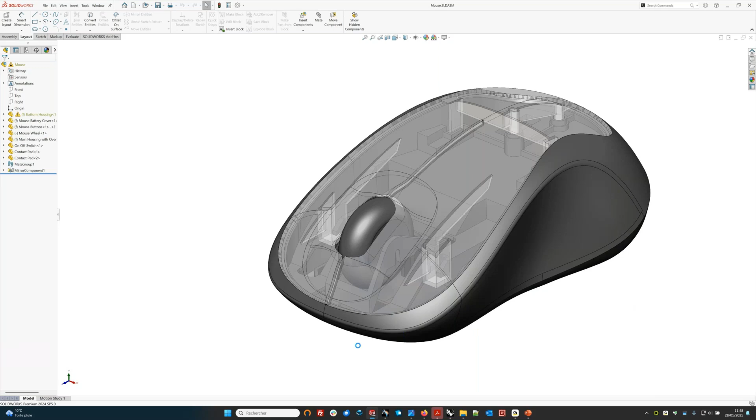You're writing the file into the folder. We will go to CATIA V5 now to show the result.

So this is it. As you can see, we are now in CATIA V5, and you get your full model, your full assembly. Again, you have the same colors as we have seen in SolidWorks. You have the components, you have the names, and we even have preserved the transparency effect.

So you're ready to work now in CATIA V5.

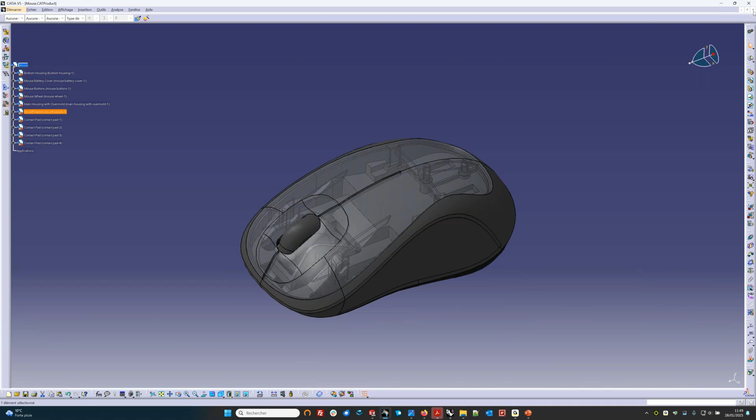A second case study, now we're going to show Cross Manager a little bit. So we will start with another file, this time from CATIA. This is the source file that I show you in CATIA.

As you can see, what's interesting here is we have a lot of PMI information. As you may know, in CATIA, they are organized in views and captures.

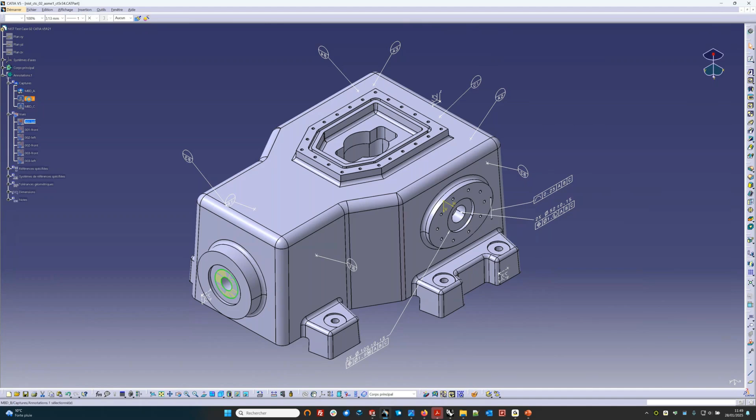We got 3, for example, here. So you can activate A, B, or C. I will show you that this is also converted.

So we will use this time Cross Manager. Imagine you don't own a license for CATIA, but with Cross Manager, you can perform the conversion. So always the same, very straightforward.

You just have to select the input format. I propose here to make a conversion into JT.

Imagining that you have files from CATIA and you want to send the files to a partner who's using Siemens PLM software, it's a good thing to use JT, which is the standard conversion format of the Siemens world.

So in Cross Manager, just input, output. Then you have some options in the configure menu where you can manage visibility of the entities, configurations, layers, things like that, assembly information, and some filters.

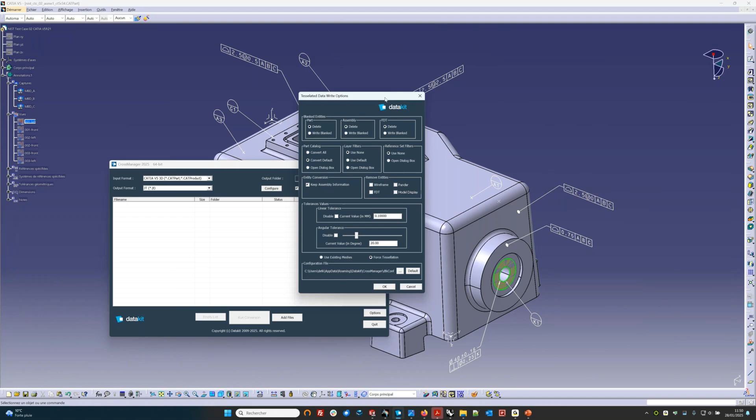And also, if the output is tessellated, you can parameter the tessellation. You can set it.

Then very simple, you just take your file, import it into Cross Manager. So either drag and drop, or you have an add file button, and you can run the conversion.

So in the window, you have a status telling you it's in progress. You have a window showing up, showing you the file and progress bars. Here it's very quick, and then you have the result, status is OK.

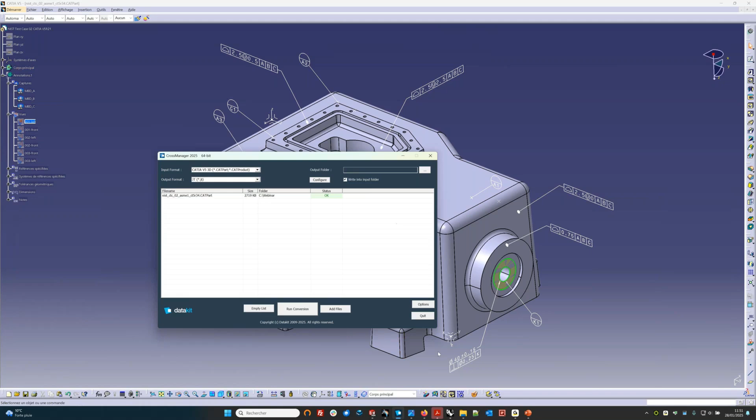So it's here that you can see that the conversion performed successfully. Another interesting thing is you get a report file after the conversion.

So this is what it looks like. It's in XML. So you get all information about the version of the product used, input, output format, version of the format, how long it took, and the entities that were read inside it.

I propose to take a look at the results. So this is the output that you get in JT. And as you can see, you've got the geometry, all PMIs are there, and also you have the captures.

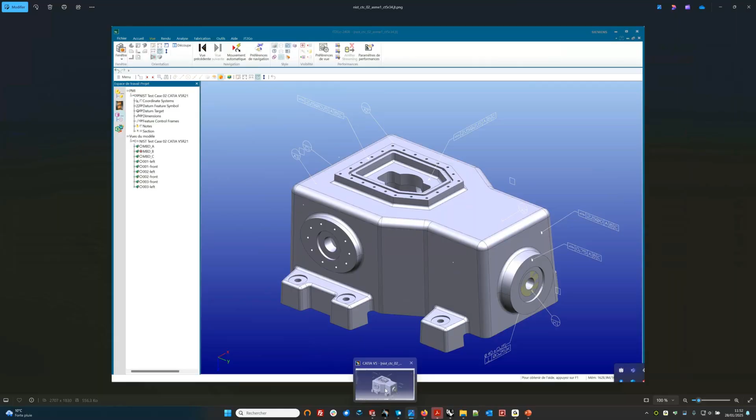We're showing here capture B. As you can see, it's really the same as what you had in CATIA. So you preserve this kind of information.

Another interesting bonus that we offer with Cross Manager is that we deliver with any purchase of license. We include free of charge a 3D PDF output.

The interest of this is you may not have the license for the software, the output format. You may not have a license for the Siemens software, and still you have to deliver files.

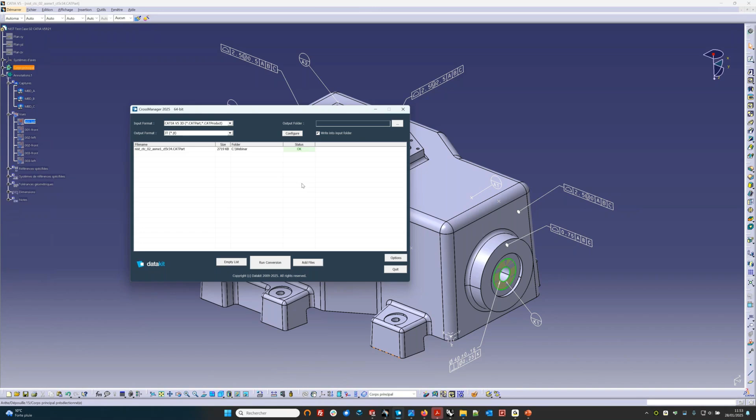So how do you do when you're unable to check them? One thing you can do is we propose export to 3D PDF. So you can convert your file and then check what we've been able to read directly in Acrobat Reader.

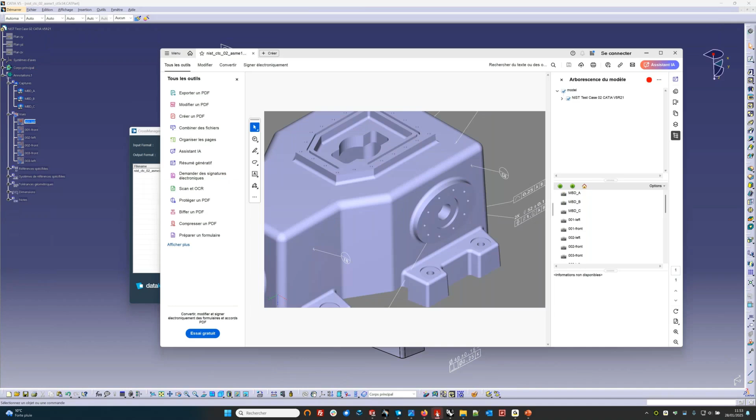We move to Acrobat Reader right here. So you get the file again, and even if you cannot read the JT, you're able to check the information that we've been able to read.

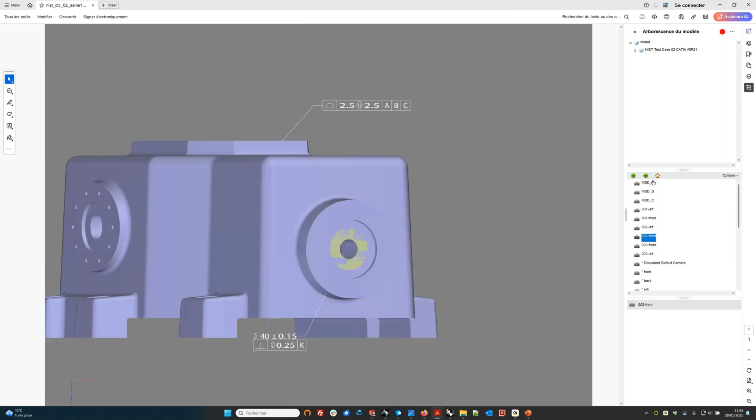You have the model here, you have different views, everything is there. You have the captures, A, B, C, everything is here.

You also have information in the tree. If there are metadata, you can also check them in Acrobat Reader. You can see them at the bottom right of the screen. And in addition to this, in Acrobat Reader, you can do measurements and you can do cut views, things like that.

So these are the functionalities with Cross Manager. Now let's move on to a third case. Now we will move to Rhino to show the Rhino plugins.

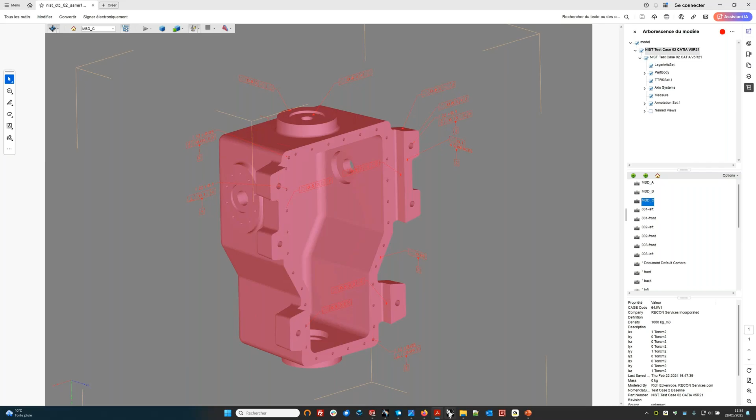Again, once the plugin is installed, you get a menu directly here, Datakit Exchange, very straightforward. This time I will show you just some imports of the same assembly in various formats to show you the multiplicity of formats. As you can see, directly from the menu, you have a vast number of CAD formats to choose from. So let's say you want to load an assembly in UGNX.

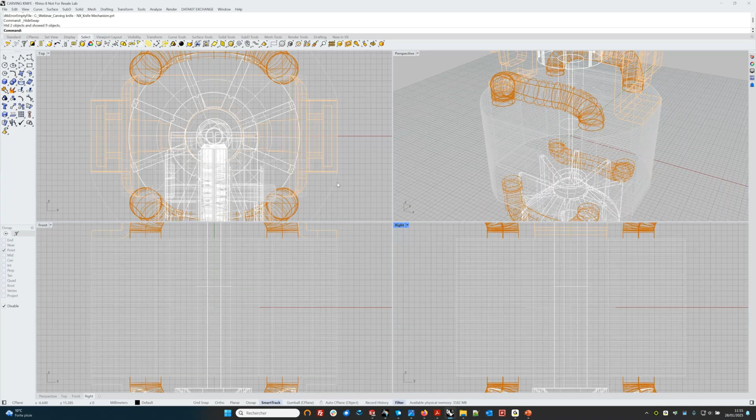Just a few clicks, UGNX open, and you get your file. You just have to select the head of the assembly and you load the whole assembly. Again, you have a window with progress bars to show you where you are in the conversion process, and you get your file directly in Rhino. You're ready to work in Rhino. So you can work with people from Siemens using UGNX, no problem. You got all the components, as you can see, directly in Rhino.

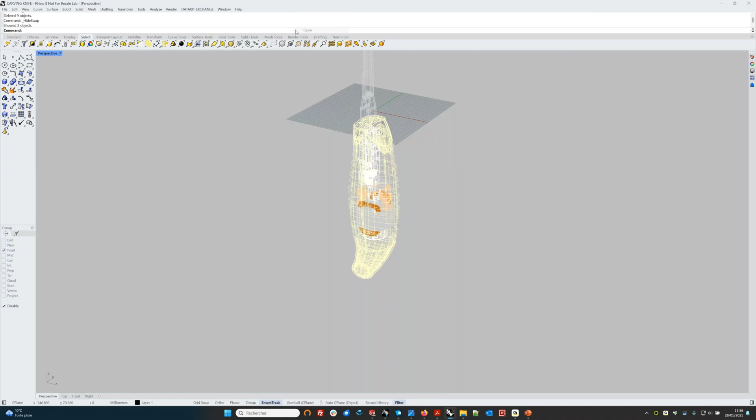Let's say now you're working with another partner using CATIA. No problem, import if you have the license, CATIA V5, open, and you get your file in CATIA format. Same process, you've got your input window with progress bars. All components are loaded. You're ready to work in Rhino.

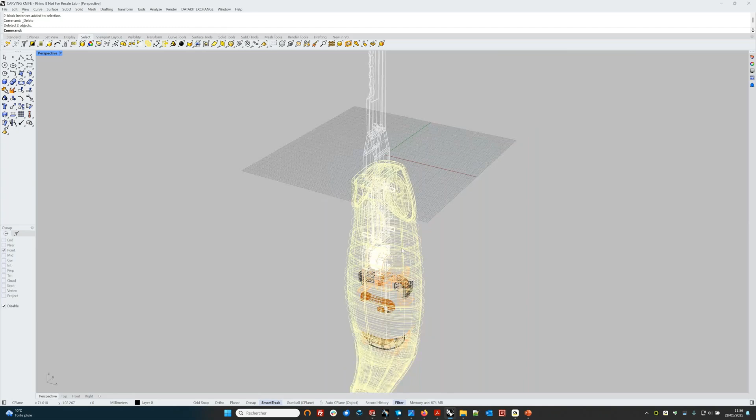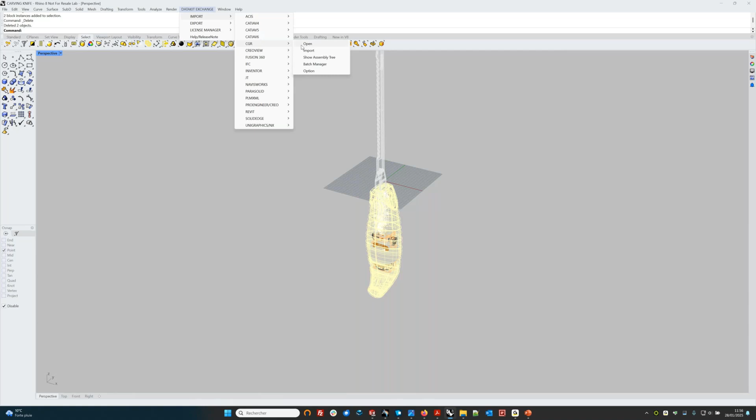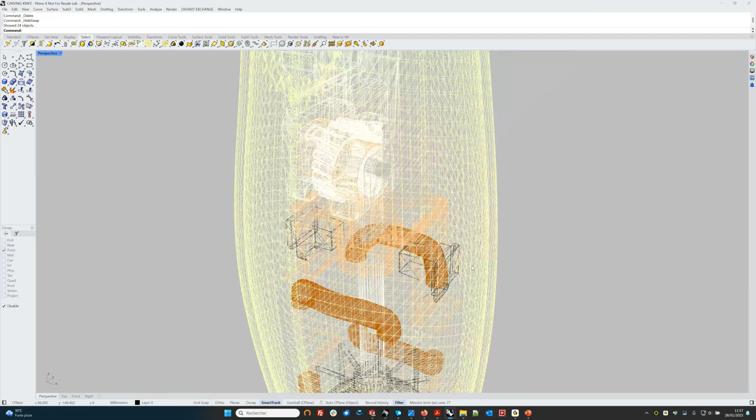One last thing I would like to show you is the fact that we also handle tessellated formats, which are made of mesh facets. So we will illustrate this by importing a CGR file. CGR is the graphical representation format of CATIA, and it's made of tessellated geometry. Again, same process, you browse to your CGR file. It's even faster because it's mesh, and as you can see, you get your geometry with all the triangles. Since Rhino can handle mesh, this is what you get, and again, you're ready to work.

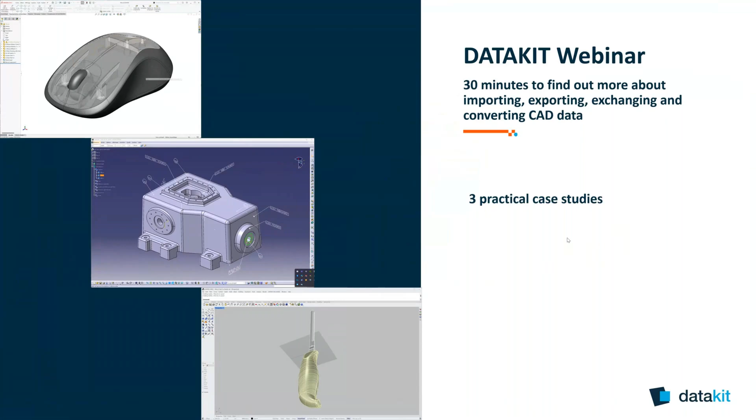So this is it for the 3 case studies. I will go back to the presentation now. Thanks for your attention for this presentation. A little summary about the advantages offered by our converters.

There is a wide range of data that is quickly available. As you may have seen, we handle parts, assemblies with their complete structure, components with the names, colors, transparency, metadata, PMIs. The conversion is faithful, with no data alteration or loss of information, and the transfer is fast.

We have in mind that the preservation of the integrity of exchange data is essential to ensure that all critical information is correctly retained throughout the product lifecycle. So this is really important. You may also have seen that the range of CAD formats was very broad as well. We have most major CAD formats on the market, and more.

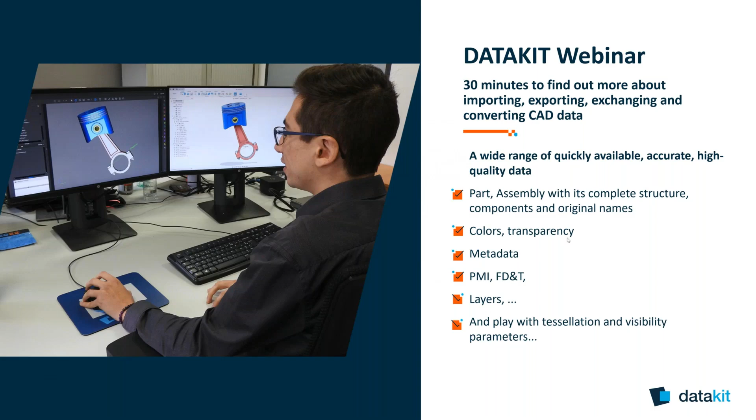Then a few words about the different types of license that we offer. We try to base our commercial offer on the needs of the company, its size, its various units, and also the frequency of file conversion. The first option is a perpetual license, so no expiration date. It comes with an annual maintenance contract that you can subscribe to. So the license never expires, and if you subscribe to the maintenance, you have access to updates and support.

Second option, the annual license. That is a more economical solution for temporary needs or one-off conversion. So it's your choice depending on your budget and organization.

In addition to this, the licenses can be fixed, node locked, so attached to a single computer, or it can be a floating license that is installed on a license server and available for several users, with the option of having one or several tokens, that is, several simultaneous accesses for the license. And finally, we offer bundles for the converters that are most widely used in certain sectors, especially well suited to SolidWorks and the Rhino plugins.